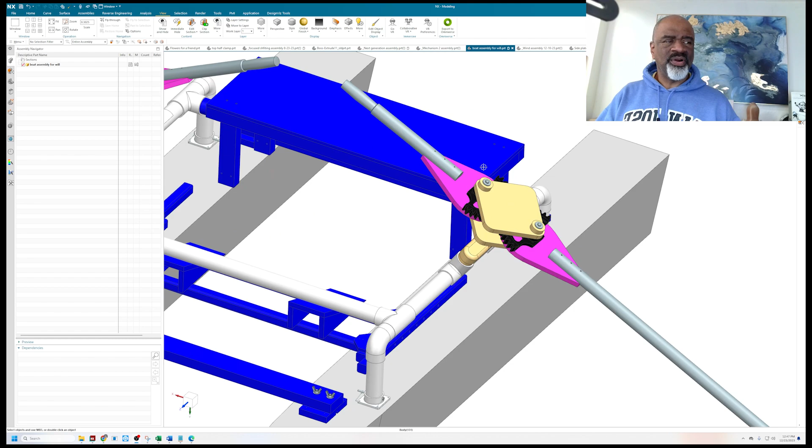So what I have here is a pontoon boat, and it's a forward-facing rower. In other words, you use these oars and you row this boat just like you normally would, only you get to face forward instead of facing rearward, the way you'd always do on a regular rowboat.

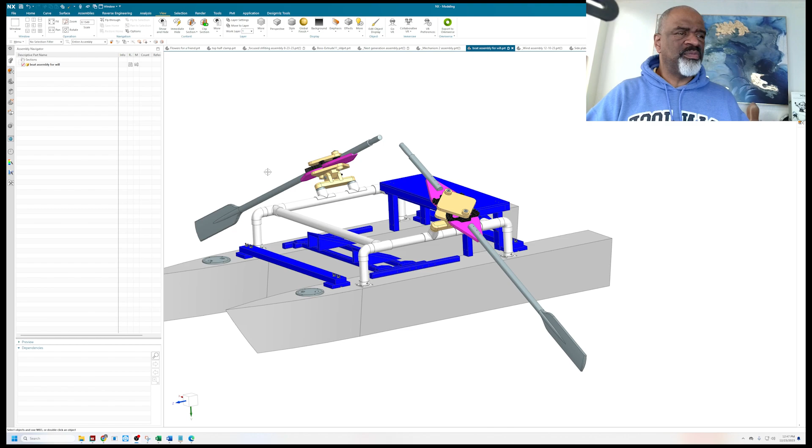So this rowboat, we wanted to put it together and not really have to spend too much and work too hard. So we opted for a PVC pipe frame that holds these two robots together.

Robots? Pontoons. I don't know where robots came from. Got robots on the brain, I guess.

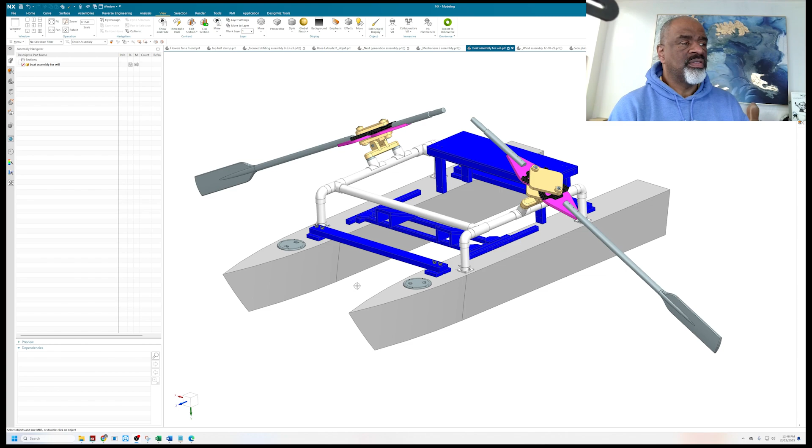These pontoons were made of thin plywood, very thin plywood, 0.125, a 1/8 plywood, and there was some structure to it in certain areas. And then we fiberglassed the whole thing. We put fiberglass cloth on it, and we used the polyester resin, and then we did a gel coat. Took a while. And then we cut in these ports that we purchased, and that's just to make sure that if it does leak at all, we can evacuate that.

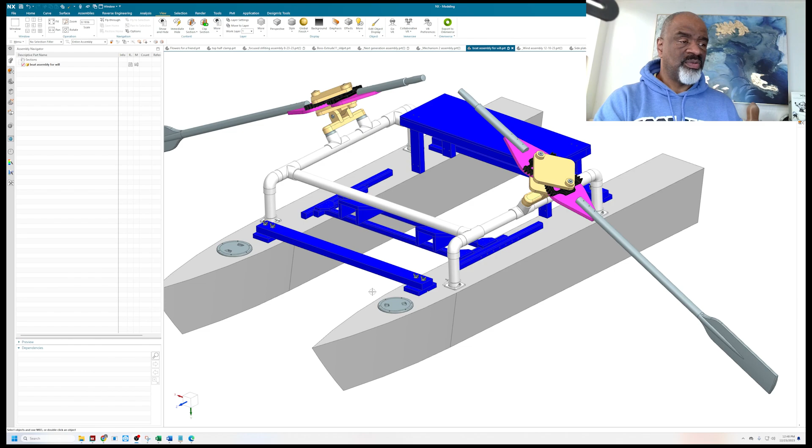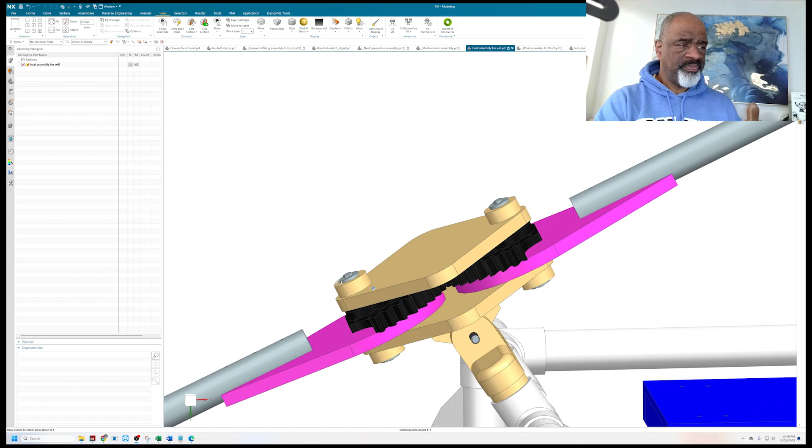And we've got these kind of crossbars. We've got an adjustable footrest that we made out of 2x2s, and this little seat that we made out of a piece of plywood and some other lumber. And so the cool thing is this little gear system, that's the heart of the entire invention here. The gear system reverses the direction on the oars, which you'll see in just a moment.

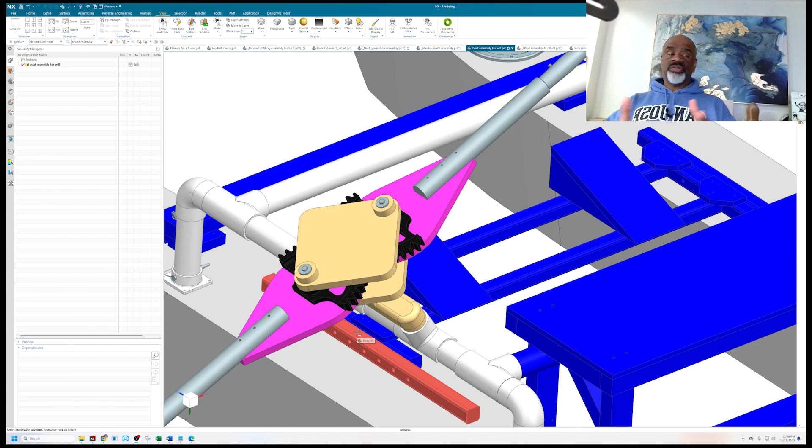And these gears were printed out of carbon fiber nylon, so they were 3D printed. We didn't know if it was going to work. We didn't have any indication. I mean, we could have done this whole incredible finite element analysis, etc., but in the end analysis, we wouldn't know. We didn't know the exact properties of this substance we were using. So we just tried it. And spoiler alert, it worked.

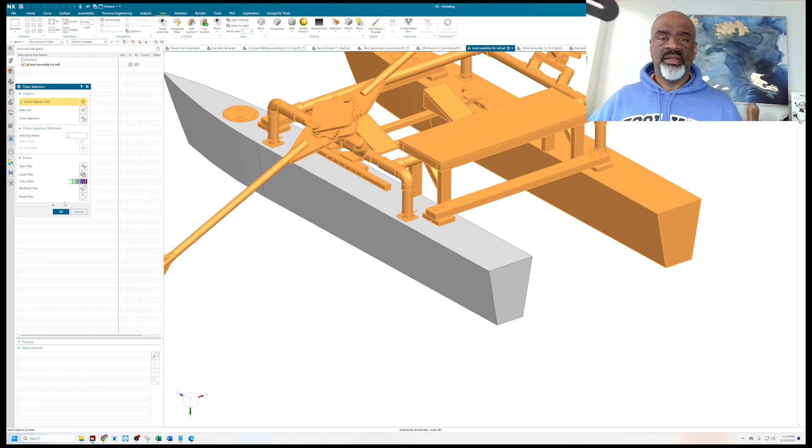So now I'm going to take you through a quick calculation of the displacement. So I'm going to say Control B and select everything and hold my finger on the Shift key and deselect just that little side hull. Okay. If I say Control H, you can see that this is just made out of thin plywood.

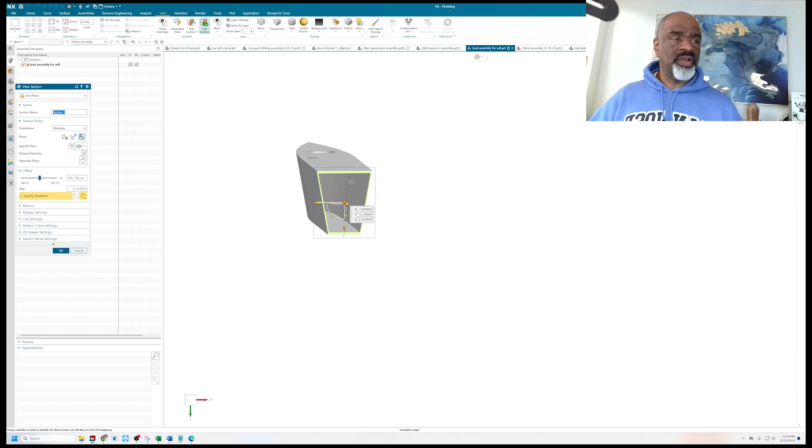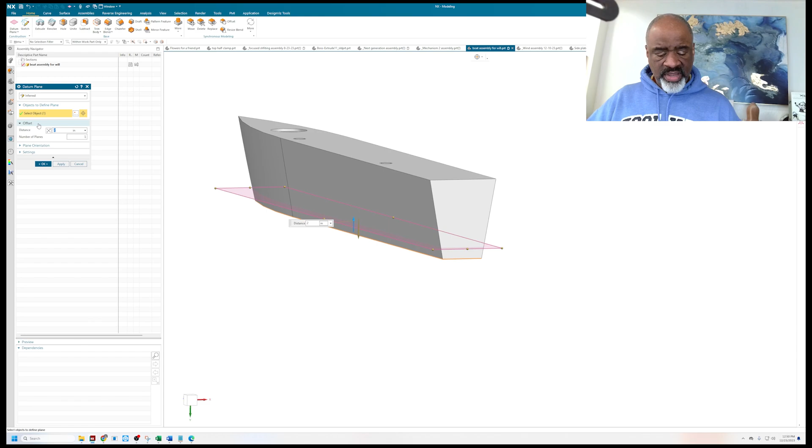There's a plywood back here and thin plywood, but what I really need to know is what's the water inside. If I can calculate the weight of the water inside, then of course that's how much it can hold. And so the very first thing I'm going to do is make a water line. I'm going to go up from here, and I'm going to arbitrarily say 8 inches. So let's say the pontoon is in the water by 8 inches. And so now we have a datum plane there. And now we can determine what the weight of the water would be.

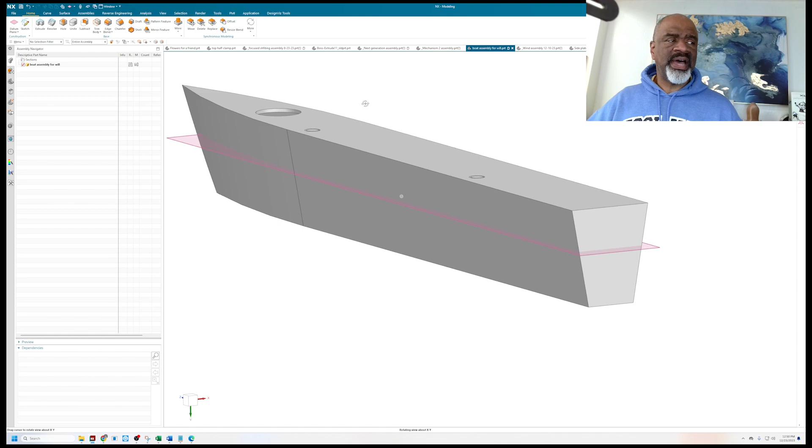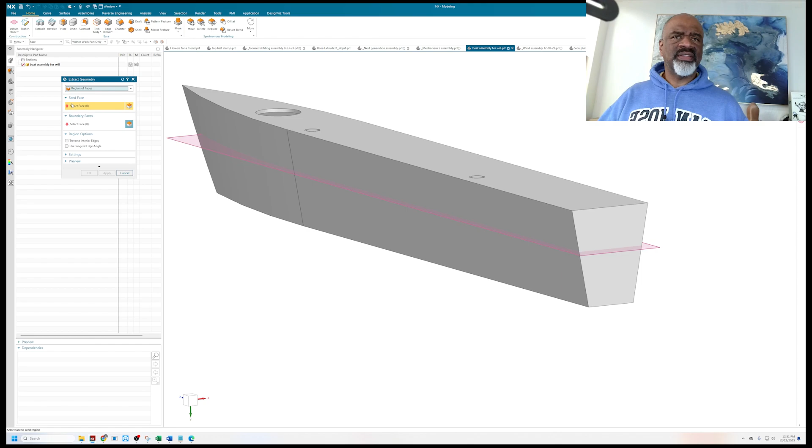The easiest way I know how to do that is to extract the internal surfaces and make a solid, and then clip it with the datum plane and weigh it. So in order to do that, I'm going to say extract geometry. I want region of faces, and I want to select an internal surface as a seed face. The boundary faces are simply here.

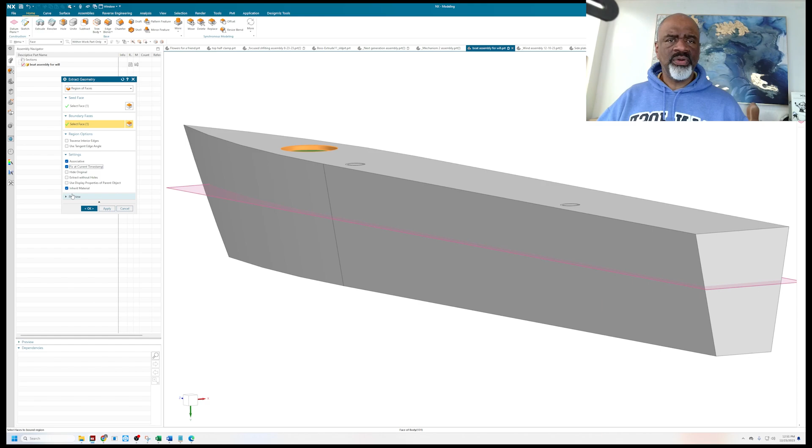And I want to go into settings and make sure this is associative. And I want to fix at current timestamp. And I also want to hide the original. So I say OK. And what I get is a model of all the interior surfaces all sewn together.

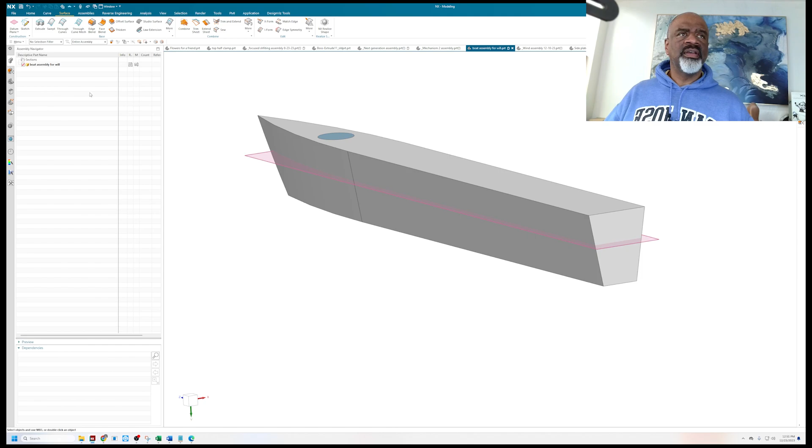Then I want it to be a solid, so I'm going to go to Surface, More, Bounded Plane, select this edge, say OK. Go to the sew command. So I'm going to put this together with this, and I'm going to click on this show result to make sure it says solid body created.

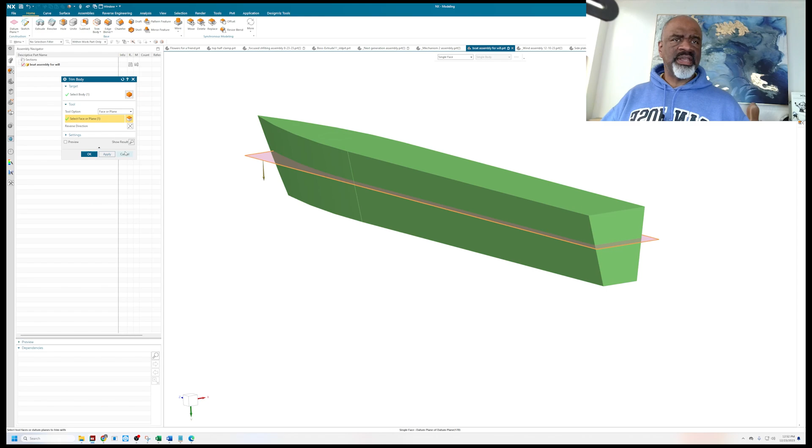That's good. Then I'm going to go back to home and use the trim function, trim body. There's the body. There's the datum plane. Switch the polarity. Okay, so what this little shape represents is the internal volume up to the water level, and we have to assume that it's displacing water in about that size plus a little bit more.

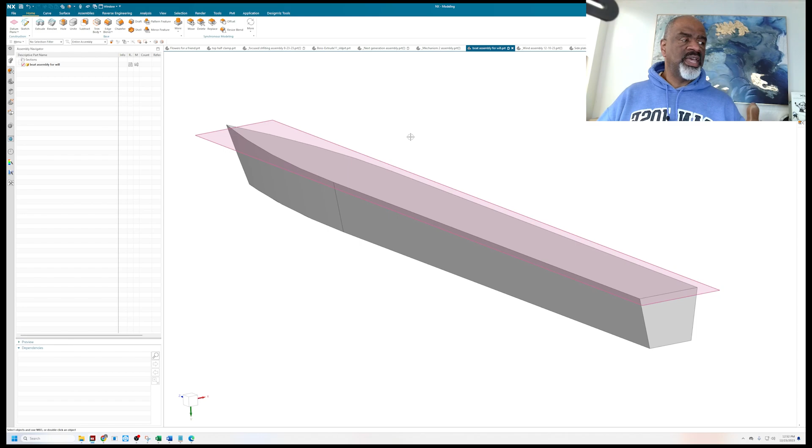So if we put the mass properties of water onto the solid and weigh it, we'll know exactly how many pounds this one pontoon can hold. So we'll do Tools, Assign Materials. We're going to look for water.

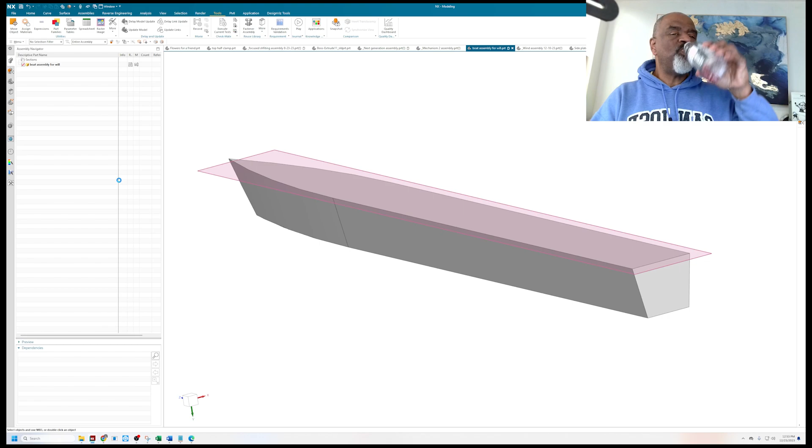Water, as we all know, has three phases. So we'll certainly give it the liquid phase as opposed to the solid, because the solid is less dense, which is kind of baffling. Water is so special the way it does that. This took a long time to come back because my libraries are not local. So here's water. Okay. And so there's the piece, and say OK.

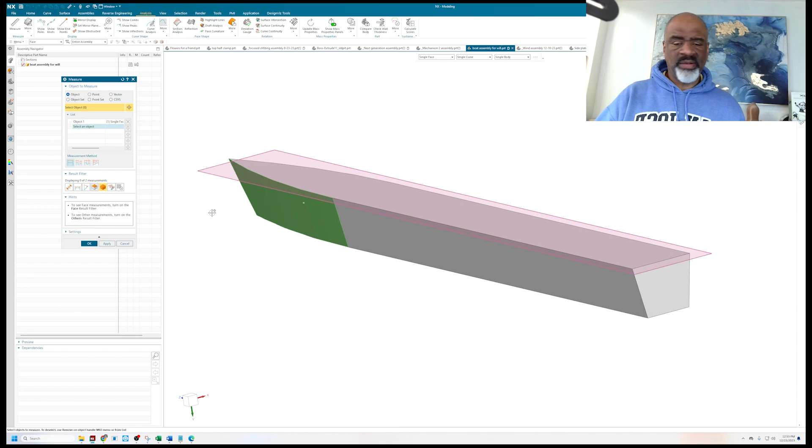And then go to the analysis tool, Measure. What we're going to do is measure body. I'm going to take off all these other things. Measure body. And I want to make sure that this says object. I'm going to select the object. Whoops, that's not the object I wanted. Let's remove that object. Not working, hold on. Let's do measure again.

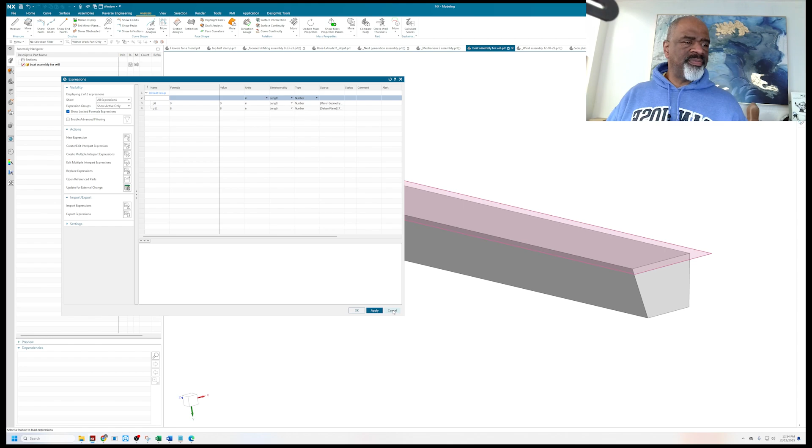We've got the properties correct, and we're going to do solid body this time. And everything is as they were then, so I'm going to click on this and say OK. Now, since my screen is so big, the actual dialog came up in another place. But hold on. All right, one more time. So we're going to leave that on. Select an object. There it goes.

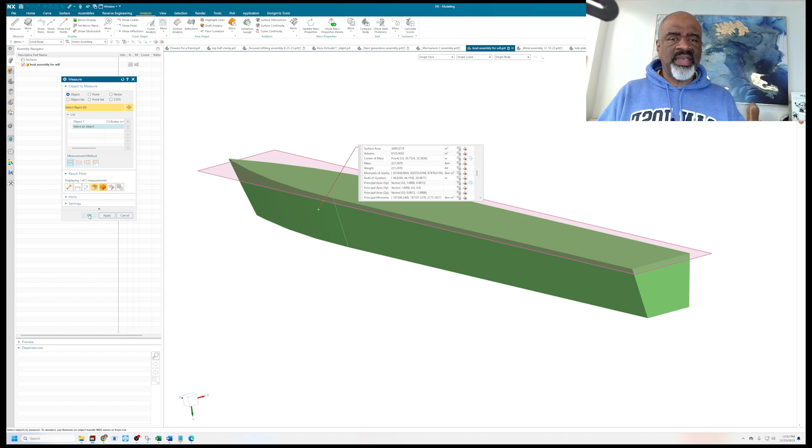So it says the mass is 221 pounds. 221 pounds, which means that with the two hulls together, we have 440-some-odd pounds that we can lift just with this level of immersion. That's 221 and a third pounds. Okay, so that's really a good method. I use it all the time to calculate the volumes of very complex surfaces.

And now getting back everything. Like that. Okay, so I'm going to say File, Save All.

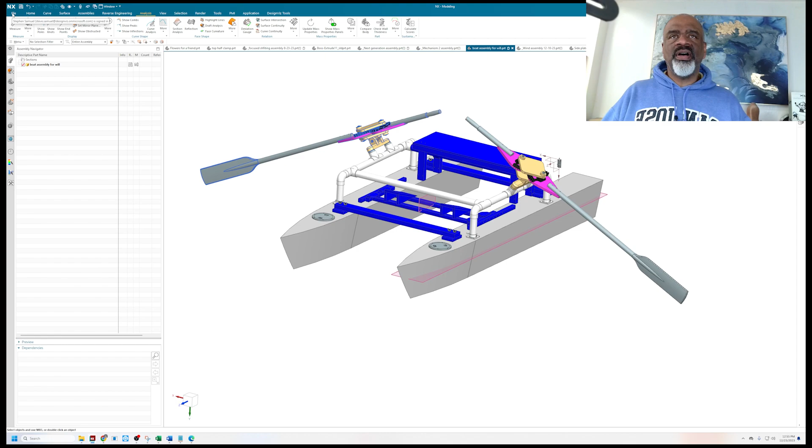It was a beautiful day in San Jose, California, and we made our way to Calero Lake Reservoir, where we had a podium set up, and I was able to speak to 25 friends that came to see the launch, and it was wonderful. And I talked about the importance of community and family and creativity, and my brother had on his wonderful hat, and we had some local politicians come and say very positive things, and it's a very close-knit society we live in.

And then we had friends help launch the boat. It was terrific. I jumped on and I was so excited. And to my delight and surprise, the oars worked so well. And as I pulled them, they pushed the boat forward, and in my excitement, I didn't have a personal flotation device on, so the ranger came by and yelled at me.

But as you can see, it was a beautiful day in San Jose, and everybody was happy. We ate some nice barbecue food and really enjoyed each other. But the key thing is the oars worked perfectly, and it was a big success.